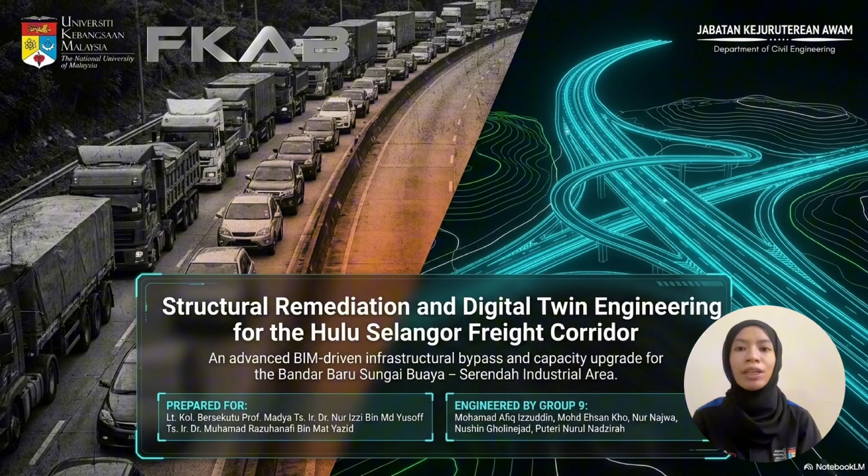We will present our project titled Structural Remediation and Digital Twin Engineering for the Hulu Selangor Freight Corridor. This project focuses on one of the major freight transportation corridors connecting the Bandar Baru Sungai Buaya industrial area to the Serendah industrial area. The corridor experiences heavy traffic congestion, particularly due to the large number of heavy vehicles using the road every day. The industrial artery at breaking point.

This slide illustrates the study area and highlights why this corridor has become a critical transportation bottleneck. The route connects several important industrial zones. Because these industrial facilities generate a high volume of freight movement, the route serves as the main logistic corridor for transporting goods and materials. However, the existing road network was not designed to accommodate the current traffic demand.

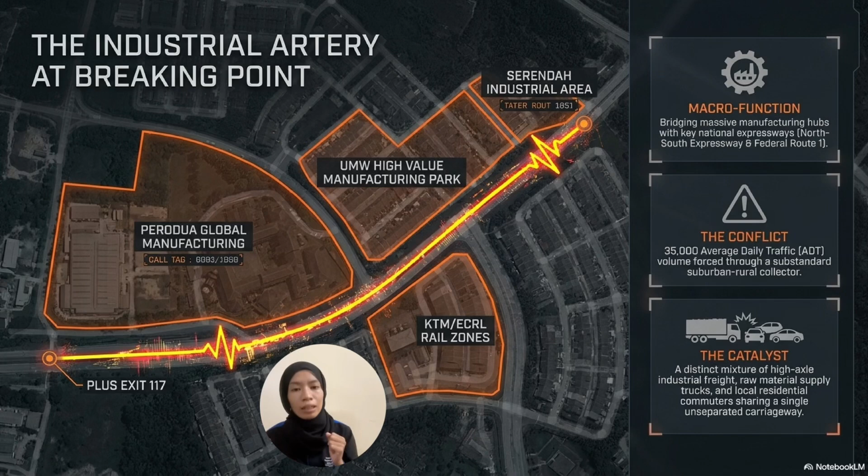As industrial activities continue to expand, the number of heavy vehicles has increased significantly, leading to severe congestion, delays, and operational inefficiencies. Therefore, this corridor has become a critical point requiring immediate engineering intervention.

These slides present the traffic condition at several major junctions along the corridor. We can observe that the average traffic flow exceeds the design capacity at almost every location. The level of service, or LOS, ranges from E to F, indicating unstable traffic conditions and even traffic breakdown.

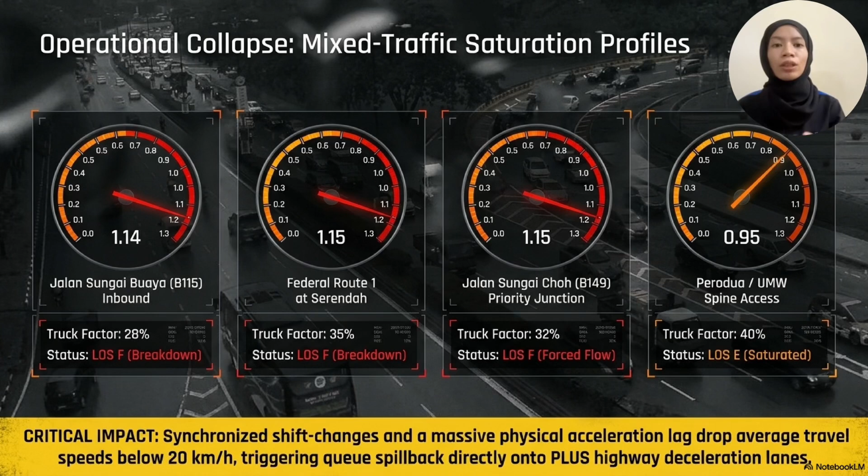During peak hours, especially during synchronized factory shift changes, a large number of trucks enter and exit the industrial area simultaneously. As a result, vehicle speeds drop below 20 km per hour, causing long queues that extend back to the PLUS highway deceleration lanes. Turning blockade.

This slide explains one of the key geometric problems contributing to traffic congestion. The existing junction geometry is not suitable for large freight vehicles, particularly WB-20 trucks, which require a much wider turning radius. Due to the limited turning space, these heavy vehicles cannot complete their turn smoothly. Instead, they often occupy opposing traffic lanes while turning, creating conflicts with oncoming vehicles.

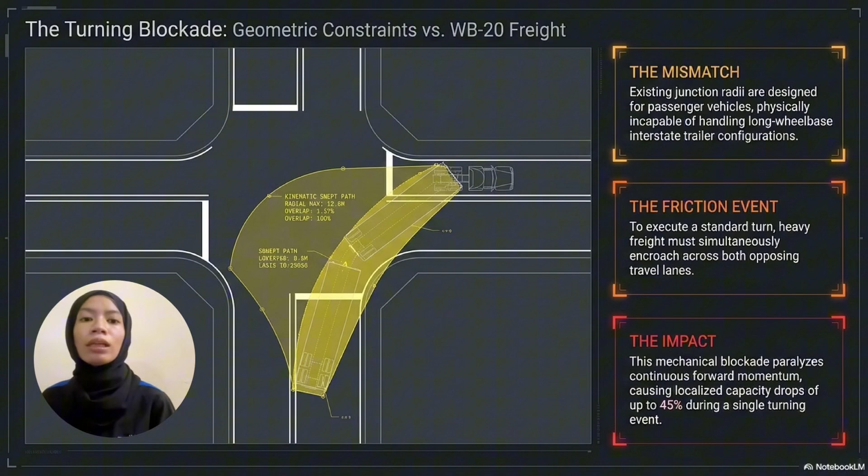This situation reduces traffic flow, increases delays, and raises the risk of accidents, especially during periods of heavy traffic. Therefore, improving the junction geometry is essential to ensure smoother truck movements and enhance the overall efficiency and safety of the corridor.

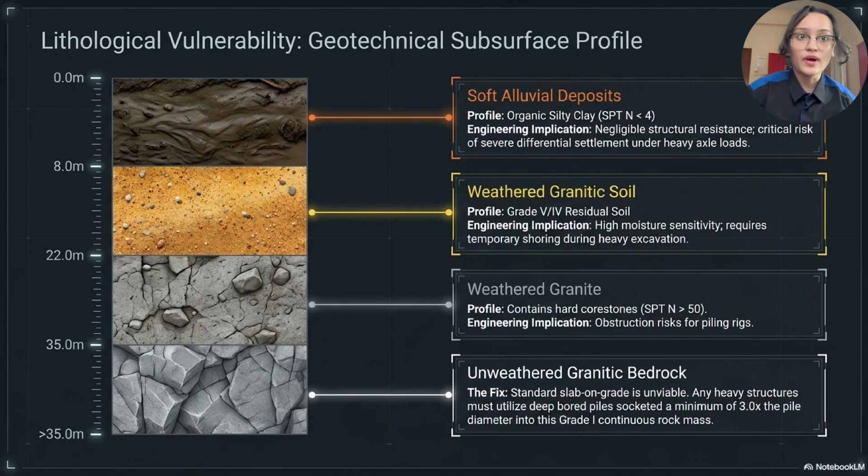For our geotechnical subsurface profile, we found 4 layers. Near the surface, soft alluvial clay has almost no structural strength, risking settlement under heavy loads. Below that, weathered granitic soil is moisture sensitive and needs temporary shoring. Deeper layers contain hard corestones that risk obstructing our piling rigs. Since stable bedrock only appears past 35 meters, a standard slab foundation isn't viable. We are designing deep bored piles socketed well into that solid rock.

For the accelerated degradation, the existing corridor isn't just congested, it is physically failing. Our pavement condition index has dropped to poor to fair, with deep rutting and cracking from repeated heavy shear stress. The drainage network is collapsing too. 40% of the culverts are blocked with industrial silt, causing flash ponding during monsoon downpours.

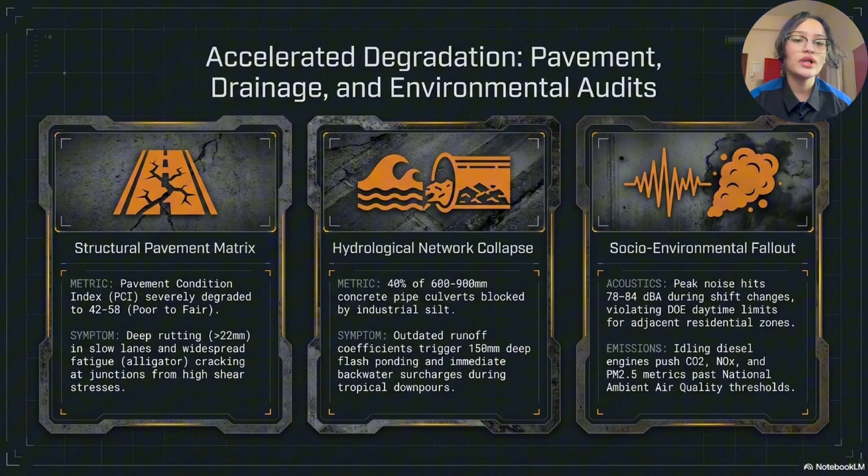And the surrounding community is paying the price. Peak noise hits 78 to 84 decibels during shift changes, which exceeds the daytime limits, while idling diesel engines push emissions past national air quality thresholds.

Given this complexity, legacy 2D CAD methods can't keep up. Manual cross-sections, slow disconnected updates, and a high risk of hidden utility clashes. That's why our team moved to the Autodesk InfraWorks 3D BIM platform.

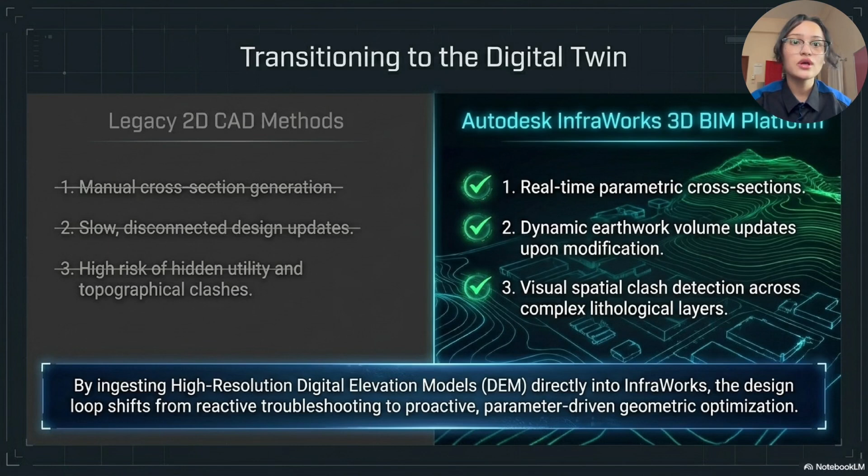This gives us real-time parametric cross-sections, dynamic earthwork updates whenever we modify the design, and visual clash detections across those complex subsurface layers. By feeding high-resolution elevation models directly into InfraWorks, our process shifts from reactive troubleshooting to proactive, parameter-driven optimization.

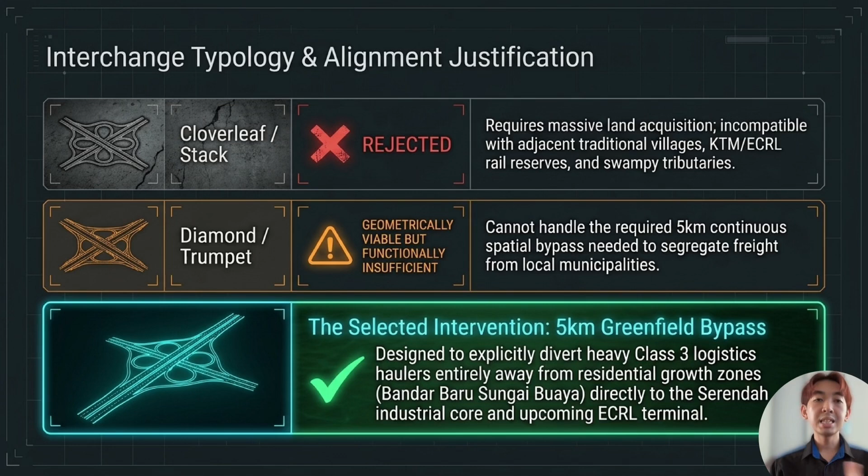Instead, our 5-kilometer bypass safely redirects heavy trucks away from residential areas in Bandar Baru Sungai Buaya and sends them straight to the Serendah industrial zone and upcoming ECRL terminal. To make sure the road is safe and efficient, our design strictly follows the JKR standards.

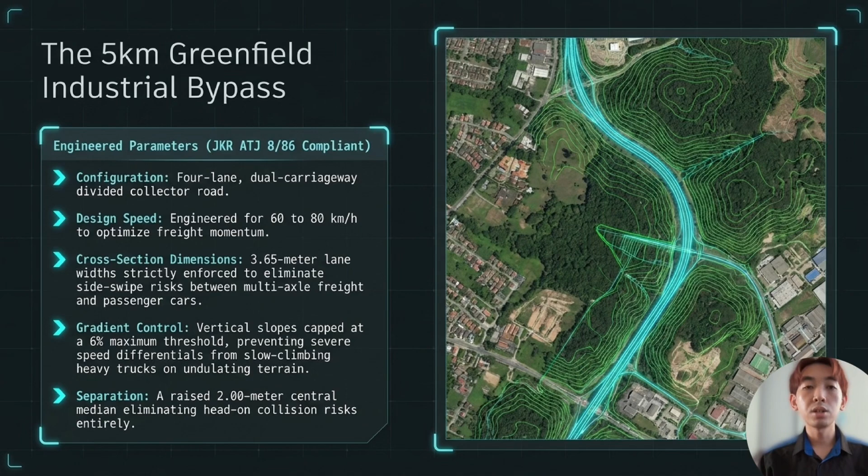It features a 4-lane dual carriageway with a safe speed limit of 60 to 80 km per hour, and we have set the lane width to be 3.65 meters to prevent sideswipe accidents. We kept hill slopes under 6%, so heavy trucks do not lose speed going uphill, and added a 2-meter raised central median to completely eliminate head-on collisions. To bring this design to life safely, we use Autodesk InfraWorks to optimize our earthworks and design parameters.

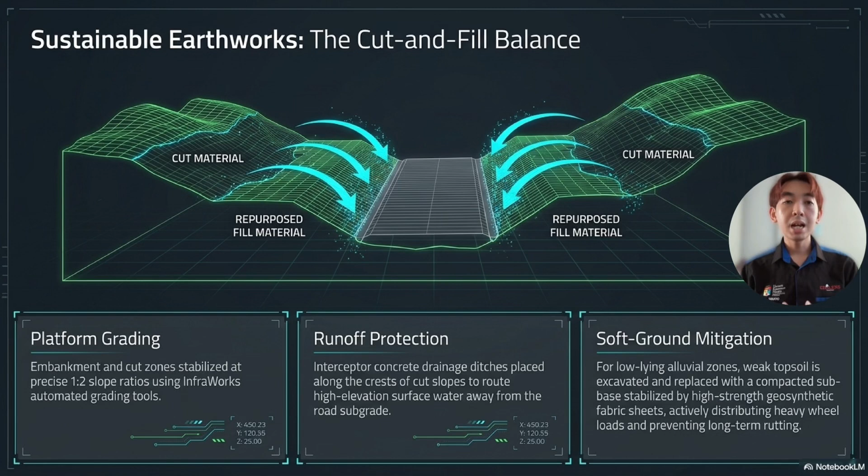We stabilize all roadside slopes at a safe 1:2 ratio, and to prevent water damage, we place concrete drainage ditches along the top of hills, cut to channel rainwater away from the road. In areas with soft muddy ground, we plan to dig out the weak topsoil and replace it with a strong subbase wrapped in high-strength geosynthetic fabric sheets, protecting the road from future heavy truck ruts.

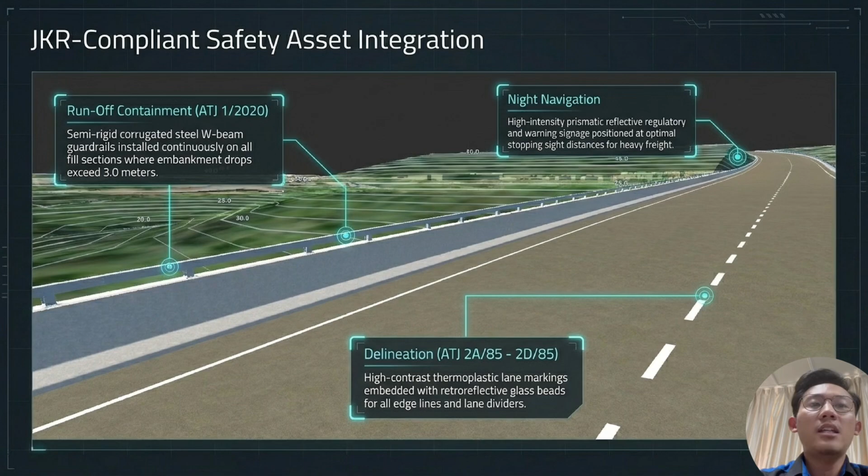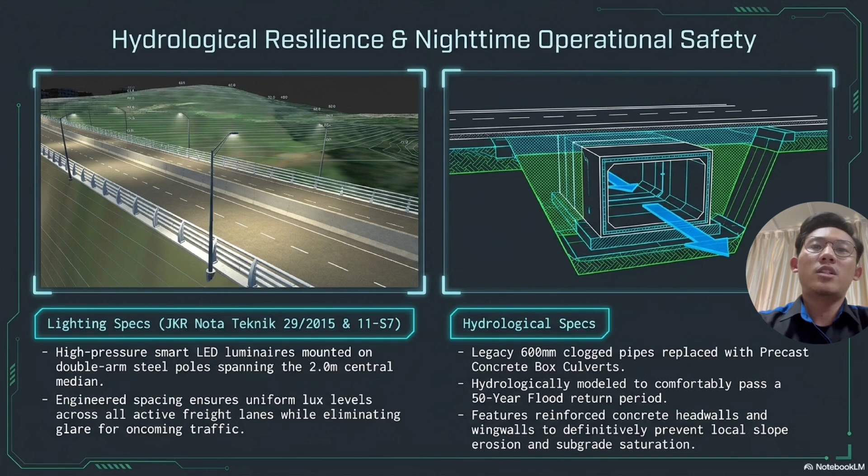Number two, hydrological spec. On the right, we solve water drainage issues. We replace all easily clogged 600 mm pipes with large precast concrete box culverts. Our simulation showed this culvert can easily handle a 50-year flood. We also added reinforced concrete headwalls and wing walls to stop slope erosion and keep water from soaking into the road subgrade.

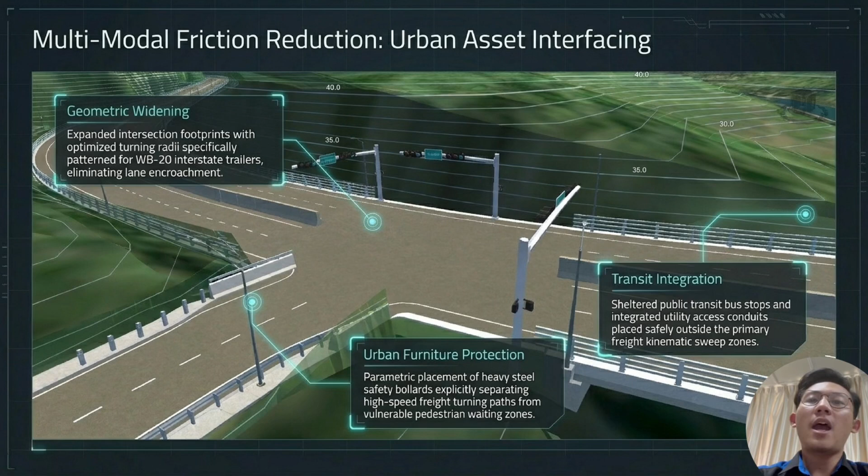Number two, urban furniture protection. We place heavy steel safety bollards to physically separate heavy truck turning paths from pedestrian waiting areas. Number three, transit integration. Lastly, we position bus stops and utility conduits completely outside the truck kinematic sweep zone, keeping commuters perfectly safe. To wrap up, this digital twin ensures our highway design is JKR compliant, freight resilient, and safe for the public. By testing everything digitally first, we guarantee a smarter and safer highway.

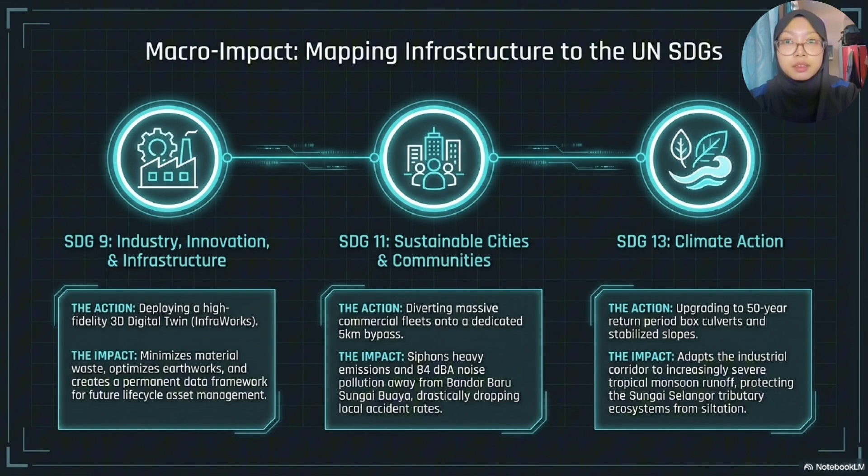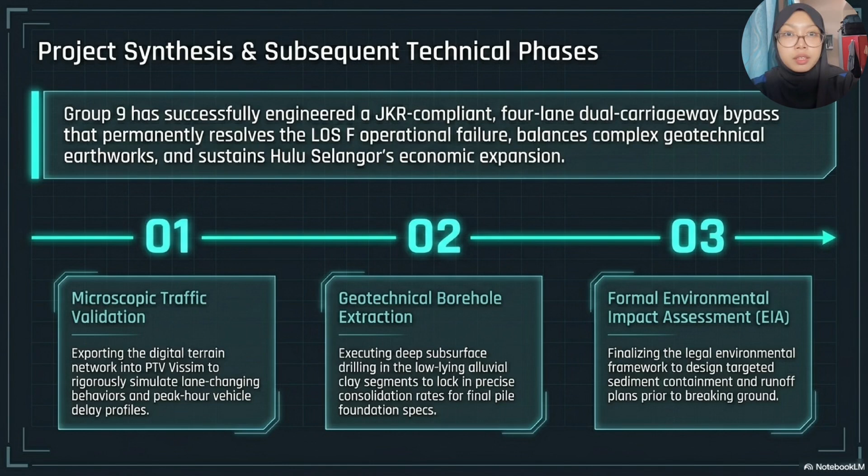And the third phase is formal environmental impact assessment, EIA. Finally, we will finalize the legal environmental frameworks through a formal EIA. This phase is critical because it allows us to design targeted sediment containment and runoff control plans prior to breaking ground. That's all from us.